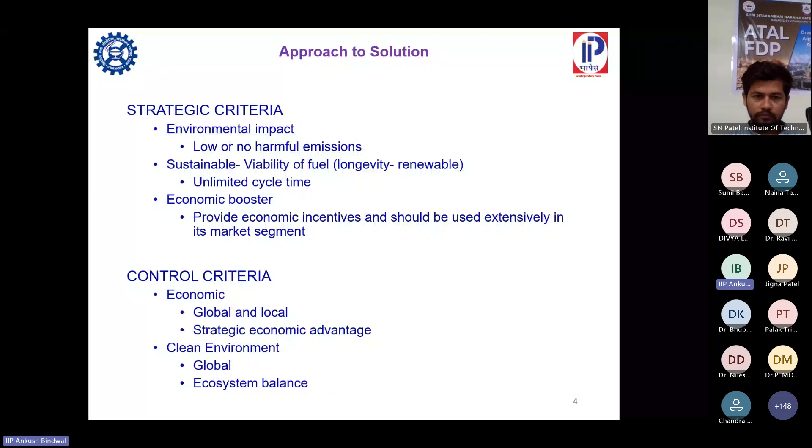Globally, what will be the effect of that fuel, and how will it affect the ecosystem balance? Whether it will maintain the ecosystem balance or disrupt it in another way. When we are trying to solve, suppose, a problem with water pollution, we have to ensure that we are not creating another problem for the landfills or any other component of our ecosystem.

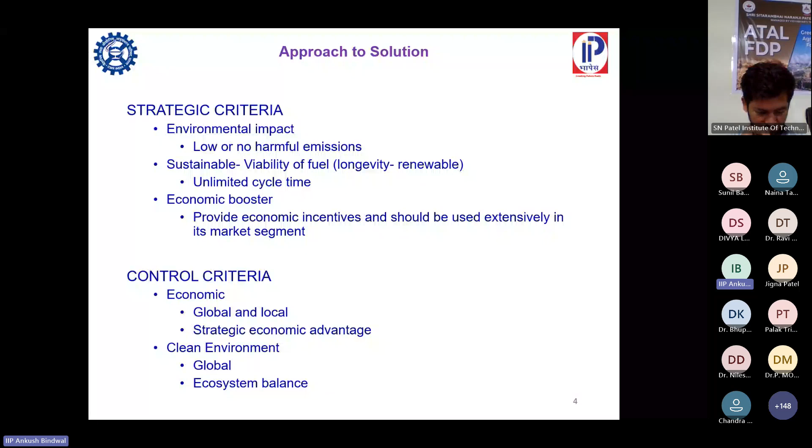So why hydrogen? This is the lightest molecule. It is abundantly found; we have it in abundance in every form in nature. It has the highest gravimetric energy density, and it is particularly known for its carbon-free nature. That's why it is being used as an energy carrier. Because of these properties, its abundance and its highest gravimetric energy density, hydrogen can deliver higher energy compared to its contemporary fuels.

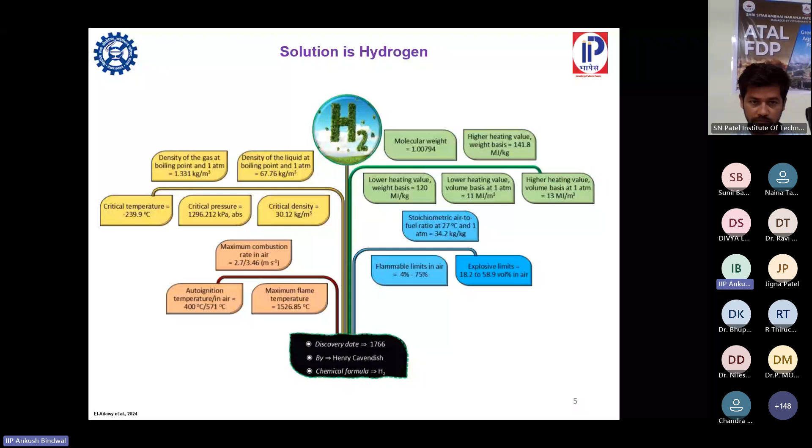Another property is that it is carbon free: when it burns or is utilized, there is no release of carbon into the atmosphere. The processes which involve hydrogen to produce and store energy do not release much carbon dioxide into the atmosphere, and that's why it is carbon free. And it is an energy carrier because it can carry energy from one source to another, and it helps us transport and use hydrogen in many forms: solid, liquid, or gaseous.

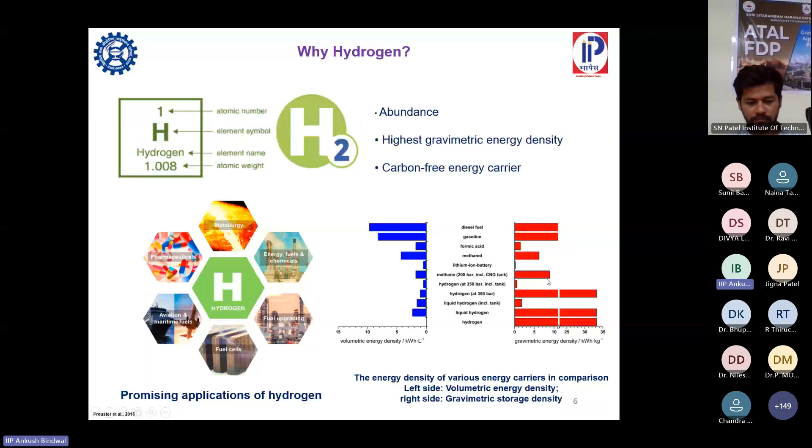So hydrogen, as said, was discovered in 1766. It is not a new concept. Long ago, in 1874, Jules Verne, a famous science fiction author, quoted: believe that water will one day be employed as fuel, that hydrogen and oxygen, which constitute it, used singly or together, will furnish an inexhaustible source of heat and light, of an intensity of which coal is not capable.

And we are living in this era where we are seeing this happen. So now everyone is talking about hydrogen, every private organization, every PSU, every nation; this globe is running behind hydrogen. But this is not the first time they are behind this concept of using hydrogen as a fuel.

The first wave was in the 1800s, when hydrogen was in the early phases, and it was used for lighting and heating. However, this wave ended as natural gas became a cheaper alternative. When natural gas came into the picture, the use of hydrogen for energy, lighting and heating purposes reduced, because natural gas was a cheaper and easier to use option. Apart from this economic, easy to use feature of natural gas, there are various safety aspects of using hydrogen in this sense. It is still struggling to find a place in these applications with the highest safety standards.

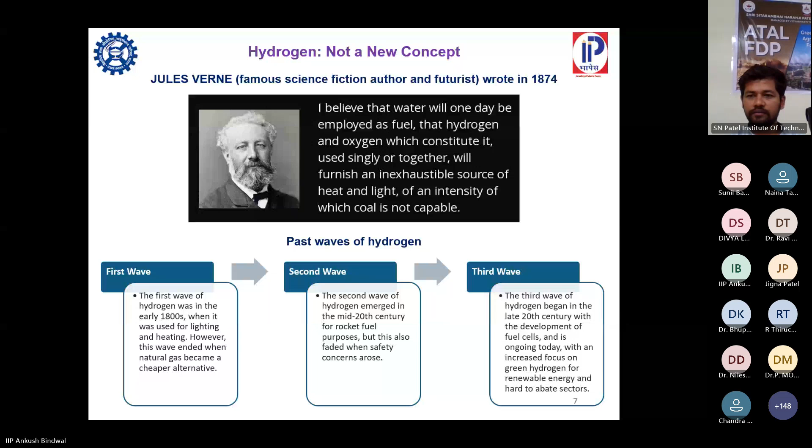Hard to abate sectors are defined with respect to decarbonization. These are the sectors which are very hard to decarbonize, meaning there are a lot of CO2 emissions. To reduce those emissions, we have to find an alternative, and this is not an easy task: replacing the old, established processes, which are efficient and economical in terms of production capacities, yields, and economics, though not with respect to CO2 emission. So it is very difficult to replace those hard to abate sectors with hydrogen.

So this is the global hydrogen demand by various sectors. As we can see, the refining industry has the highest demand. On the left side, it is current from 2020. The demand is shown in metric tons, and there are various applications of hydrogen: refining, industry, transport, power, ammonia manufacturing, synfuels, buildings for heating purposes, and grid injection for electricity purposes. So these are the current trends till 2030 for hydrogen demand globally.

And on the right side, there is the projected hydrogen demand per year for various sectors from 2030 to 2070. We can see that there is a switch from only refining, industry and ammonia. The projections say that there will be much demand for hydrogen in the power, transport, and building sectors, and the central grid. These will be the new applications of hydrogen apart from the existing applications in refining and industry.

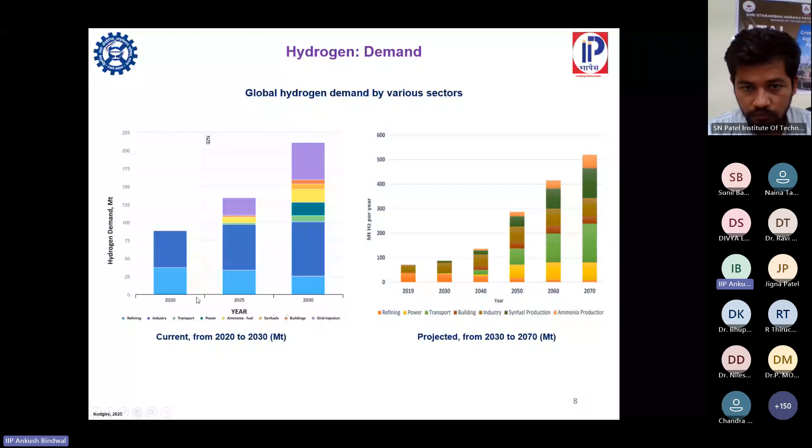So how is this hydrogen produced? There is one major, important classical process to produce hydrogen. It is through steam reforming.

This is the global statistics of hydrogen production in 2023. So these are the symbols which show how much blue hydrogen and green hydrogen is produced. Again, switch to green hydrogen, but nowadays it is very difficult to segregate it from the discussion of hydrogen, and that's why it came into discussion.

So blue hydrogen is produced by combining natural gas and heated water to form steam and includes carbon capture to reduce emissions. These are the two notable forms of hydrogen, blue and green. Otherwise, at present in many industries it is black hydrogen or gray hydrogen, where no carbon capture is being done from the hydrogen production processes.

So blue hydrogen is produced by combining natural gas, or by steam reforming, and it is combined with a carbon capture or storage option, so that carbon emissions can be reduced and this hydrogen production can be environmentally friendly, a little bit environmentally friendly, not completely.

And then there is green hydrogen, which is generated completely through the electrolysis of water using renewable energy sources like wind or solar power, resulting in zero emissions. Please remember, hydrogen produced even by electrolysis of water using energy received from fossil fuel cannot be counted as green hydrogen.

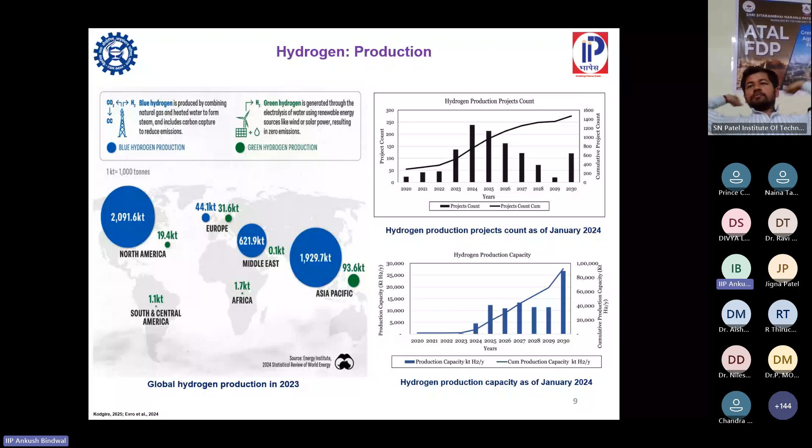So if we see these graphs, we can see that there is a fast jump in the production projects count as well as in the production capacity. It says that hydrogen is being talked about as a future fuel very seriously.

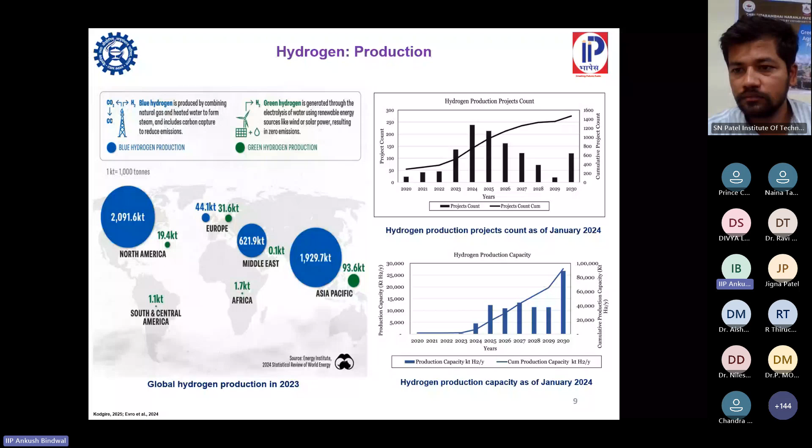So these are the hydrogen production sources and routes. The main sources of hydrogen are natural gas, oil, coal, electrolysis, and some other sources. In the breakup, among fossil fuels, natural gas and coal are the primary sources of hydrogen. Hydrogen can be obtained from natural gas through the steam reforming process. It is a very classical process.

And with the coal source, coal gasification can yield hydrogen. Whether it is coupled with or without carbon capture and storage states its nature, whether it is gray or blue. These are very high CO2 emitting processes, and we have to integrate carbon capture and storage along with them.

Then there is another option with nuclear energy, with two processes, thermochemical water splitting and high temperature electrolysis, to convert nuclear energy to hydrogen. Then there are renewable options, where solar photovoltaic, wind, and biomass can be used to produce hydrogen through electrolysis and gasification. So these are the primary energy sources, and these are the methods to produce hydrogen.

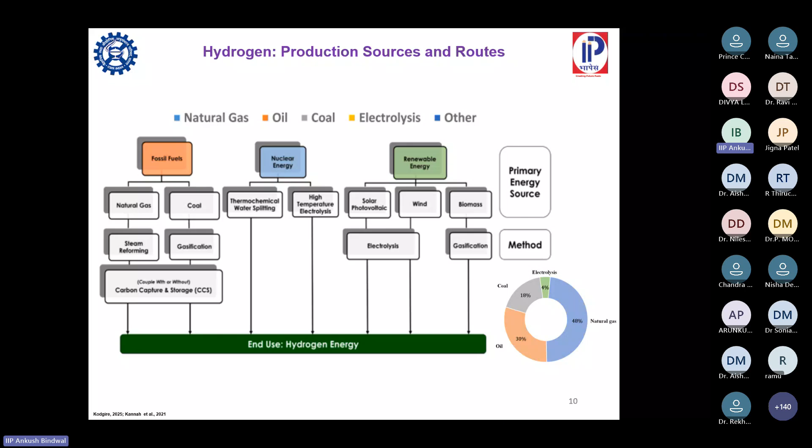In these processes, we can see the down arrow, which shows increasing carbon intensity. The least carbon intensive is the byproduct from chemical industry, then SMR of natural gas, and then coal gasification. Coal gasification has the highest carbon intensity, meaning it releases the highest amount of CO2 per kg of hydrogen produced into the atmosphere.

On the right side, there are emerging trends trying to reduce this carbon intensity or carbon emissions into the atmosphere. First is electrolysis with renewable energy, then fossil fuel plus CCS, electrolysis with nuclear power, methane pyrolysis, and electrolysis with grid electricity. These are in reverse order, so the least carbon emitting option is electrolysis with renewable energy.

Among the new or emerging options available to produce hydrogen, there are these five options, with electrolysis using grid electricity being the highest CO2 emitter among them—less compared to the conventional options, but high compared to the other emerging options.

The world is focusing on electrolysis with renewable energy as a temporary solution until we arrive at the perfect process for this. We also have the option to use conventional fuels with CCS, so that carbon can be captured, used, and stored or recycled into existing processes.

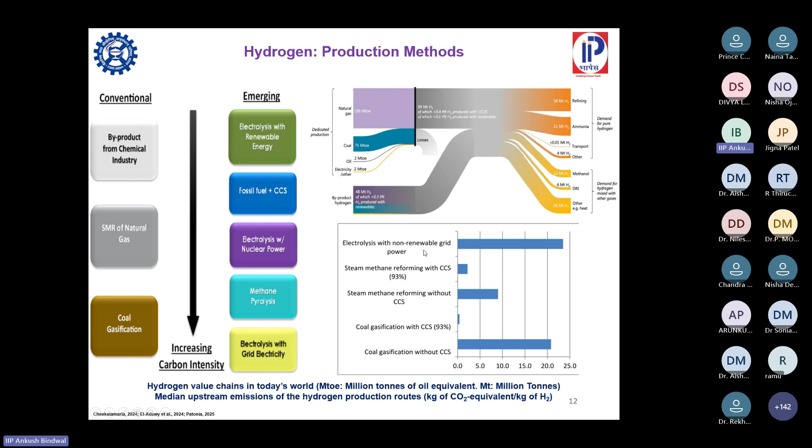Based on these CO2 emissions and sources, hydrogen can be broadly classified into these colors. Several new colors are emerging, but these are the earlier classifications used to color-code hydrogen for easy understanding of its source and CO2 emissions.

First is white hydrogen—natural hydrogen found occurring naturally in the Earth's crust, produced through geological processes without human intervention. Then yellow hydrogen, which is produced through electrolysis using grid electricity.

Turquoise hydrogen is produced by pyrolysis of methane. Purple hydrogen uses nuclear power through a combined thermochemical or chemo-thermal electrolysis process. Pink hydrogen uses purely nuclear energy to produce hydrogen.

Gray hydrogen is produced by SMR or steam methane reforming of natural gas without using CCUS. Blue hydrogen uses CCUS to capture the CO2. Brown hydrogen is produced from coal through the coal gasification process.

And then the hero of the day—green hydrogen—can be produced from water electrolysis or biomass gasification using completely renewable energy sources like solar and wind.

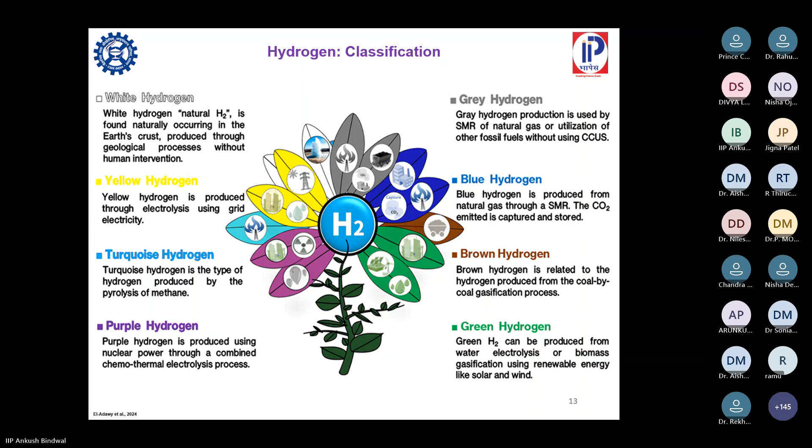So in gray, blue or green hydrogen: the gray has CO2 emitted in the atmosphere, in blue hydrogen the CO2 is stored or used, and in green hydrogen no CO2 is emitted in any form or at any stage of its life cycle or the life cycle of that particular process or product. So if we see the carbon emissions of these various color hydrogens, the lowest is green hydrogen, and black, brown or gray has the highest carbon emissions in the processes.

And if we try to quantify this, you can see the gray hydrogen produced from steam methane reforming yields 9.89 kg of CO2 per kg of hydrogen produced. While if we connect CCUS to it, it can be reduced to 3.32 kg CO2 per kg of hydrogen. And the turquoise hydrogen, using plasma, and green hydrogen using photovoltaic electrolysis or any renewable source like wind electrolysis, you can see these figures go down nearly to zero. So this is the beauty of this hydrogen combined with renewable sources.

So how this green hydrogen can help us in carbon-free transitions - these are the processes. The conventional process of steam methane reforming is now combined with carbon capture and storage. Then there is natural gas based renewable heat and methane pyrolysis process, which has carbon as byproduct, and then water electrolysis.

And these are the carbons: this is the conventional process, it has the highest CO2. This has natural gas combined with CCS, it has low CO2. Then renewable heat is integrated into it, and carbon is captured and used as a byproduct, it becomes CO2 free - though still there is carbon as a byproduct involved in its life cycle. And then there is electrolysis, where carbon is completely free - carbon is not at all involved in its entire life cycle.

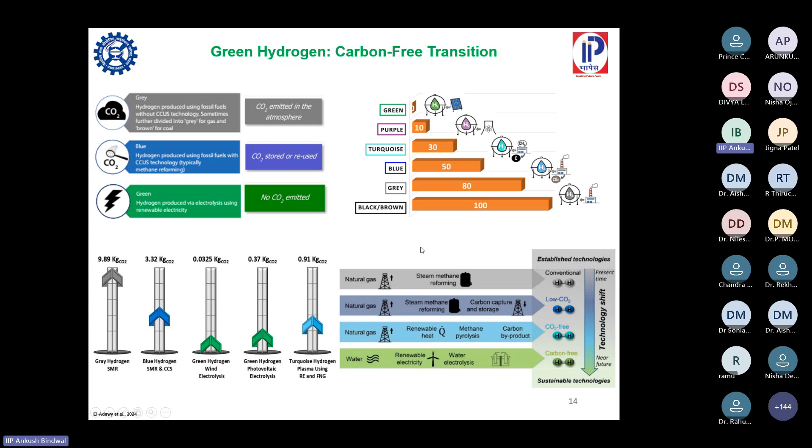So the major focus areas of green hydrogen: as a feedstock, it focuses on fertilizer industries, refining industries, bulk chemical industries, and iron and steel industries. And if you talk about its nature as an energy carrier, it finds application in energy storage, blending with natural gas for cooking or heating purposes, long-haul mobility like transport, and maritime and shipping industries.

So this hydrogen has two points: one, it can be used as a feedstock, or another, it can be used as an energy carrier. And this green hydrogen can replace fossil fuels in all of the above applications if these processes are developed with utmost care and attention.

So this is a tree again of where green hydrogen can find applications. The first is environmental decarbonization, which is the primary objective of green hydrogen's role in our generation's energy scenario. Then in industries as heating feedstocks, in buildings as heating power, in transport, in aviation industries, fuel-cell electric vehicles, and shipping in maritime industries.

Socially, the social role of this green hydrogen is that it can generate job opportunities when there are many more plants focusing on green hydrogen, or many more investments come in. It will create jobs and generation, and it will obviously help social development and economic growth as well.

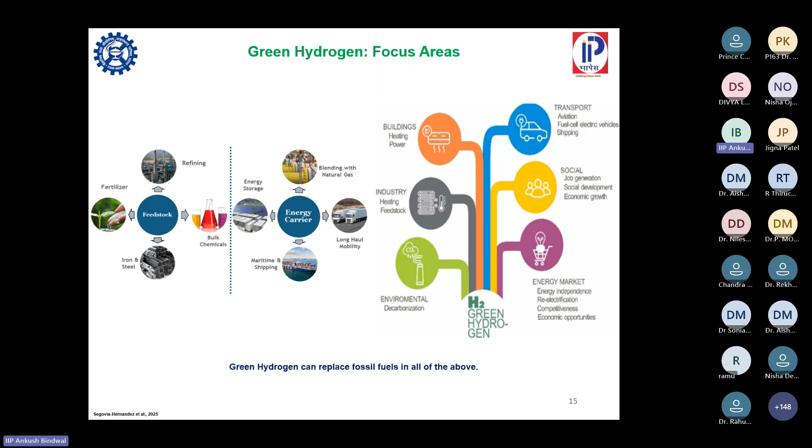So we talked about the hydrogen production methods earlier, including steam methane reforming, but now we are shifting to green hydrogen and its production methods. Green hydrogen can be produced from 3 processes: gasification or reforming processes, electrolysis, and thermochemical cycle of water splitting.

First is biomass or bioethanol. Through pyrolysis of biomass, we can produce hydrogen. Then there is bioethanol, which can be used through a biological process or a reforming process. If taken as a biological process, there are biological ways to produce hydrogen through bioethanol. And if bioethanol is used as a replacement to conventional fuels used in reforming processes to produce hydrogen, it can be used to produce syngas and then hydrogen through the water gas shift reaction.

Then there is another process: the electrolyzer, or water electrolysis. With the help of renewable energies, it can be completely carbon free and can produce green hydrogen. And then there is the thermochemical cycle of water splitting, where...

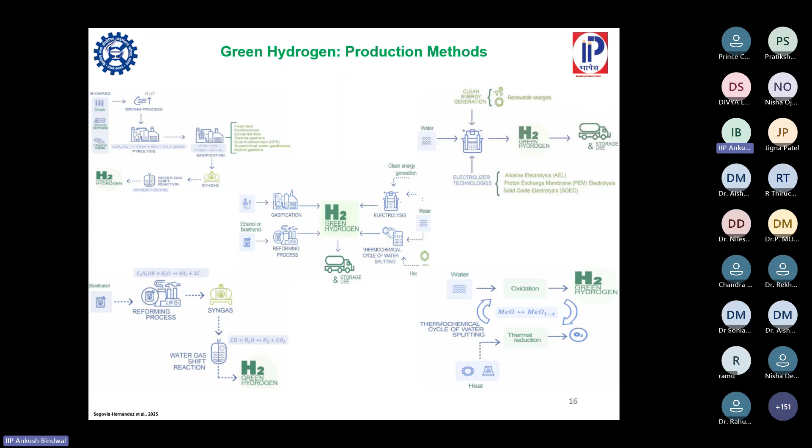To produce hydrogen from hydrogen sulfide and from refinery sources. The source is still hydrogen sulfide, which comes from fossil fuels, but looking at the trouble this hydrogen sulfide creates in the refineries, we have identified that problem and we are working on this concept of producing hydrogen. It is not green hydrogen, because at one stage we have to supply heat from conventional electricity, but it can be converted into green hydrogen if that source is replaced by renewable sources.

So these are the green hydrogen production statistics. Earlier I showed hydrogen production statistics globally, including blue, green, gray, brown, whatever color you thought of. But this is typically the green hydrogen production statistics in 2023, the global statistics, and you can see that China is the biggest producer of green hydrogen today. This is the percentage of global hydrogen produced globally and each country's contribution. China produced 75.30% of the entire global green hydrogen in 2023, and India stood at 0.85%.

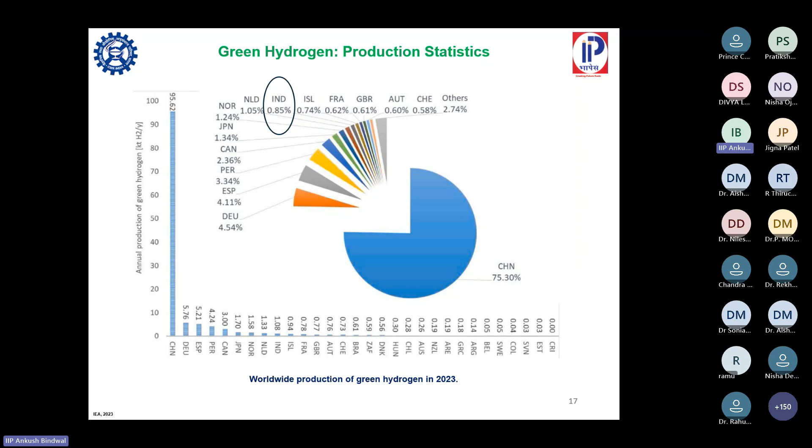So to improve this situation and to focus on green hydrogen, to invest much into green hydrogen, the Government of India announced the National Green Hydrogen Mission in 2023. It has linkages with the net zero goals, and it is one of the ways to achieve net zero goals apart from decarbonization or development of renewable energy sources like wind power. So the government is also focusing on the green hydrogen mission, looking at green hydrogen as one of the pillars to achieve the net zero targets.

Which is targeted for 2070. So in this mission, there are 3 stages. By 2030, the targets are set at 500 gigawatt of non-fossil fuel capacity from hydrogen, then 50% of installed capacity from non-fossil fuels, and reducing emission intensity of GDP 45% below the 2005 level. Then by 2047, we have to achieve energy independence, and by 2070, we have to achieve the net zero goal, that we will not emit any CO2 or carbon in the atmosphere by then, and we have to modify our processes to achieve this target.

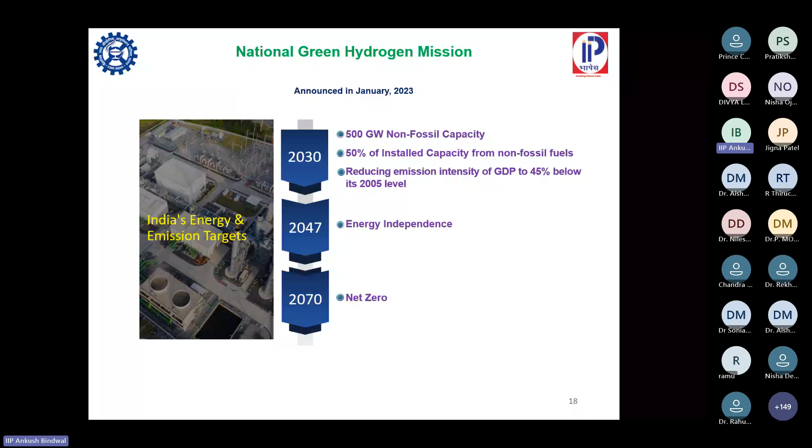And these are the short-term targets to achieve by 2030 under this National Green Hydrogen Mission. So at least 5 million metric ton of green hydrogen annual production should be there. The electrolyzers should have the cumulative capacity of 60 to 100 gigawatt producing hydrogen. Then total 125 gigawatt of renewable energy capacity for green hydrogen generation, and associated transmission network to replace the current electricity power grid.

We have to save rupees 1 lakh crore in import savings, that we are currently importing hydrogen, and we have to increase our production capacities so that this huge amount can be saved and we can achieve an independence in producing hydrogen. We have to avoid 50 million metric ton of CO2 emissions, annual emissions by 2030.

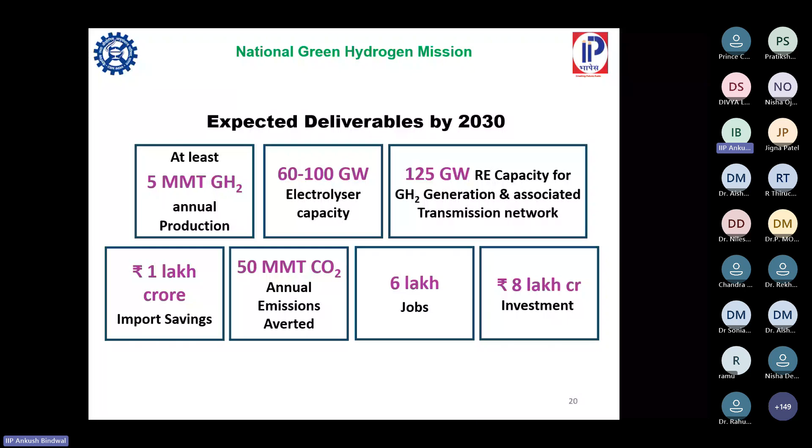While doing this, we have to create around 6 lakh jobs and 8 lakh crores of investment from Indian industries, private sectors, both sectors, and global industries as well. So these are the targets set, and everyone in this chain is working to achieve these targets.

So these are the existing and potential sectors in India that will be benefited by using green hydrogen. So the basic target of this green hydrogen mission is the electrification and hard to abate sectors. So electrification is one of the basic targets. There are many aspects of using green hydrogen for various purposes, but the major purpose is to reduce CO2 emissions from these hard to abate sectors like refineries, fertilizers, steel, chemicals, and

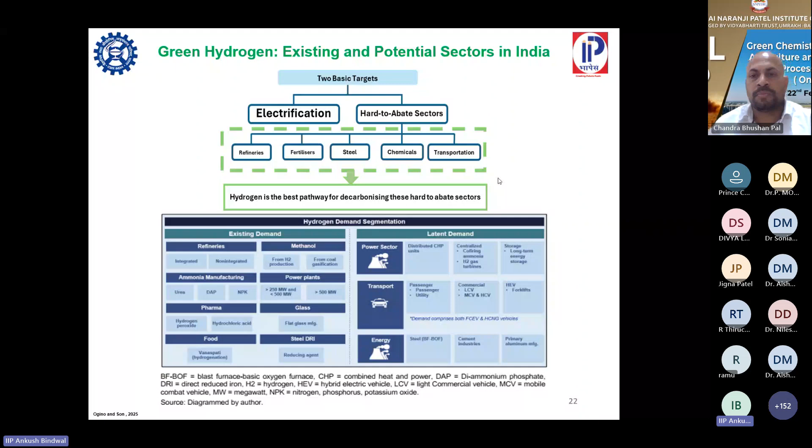So green hydrogen's critical roles during the energy transition to combat global warming are these. First is renewable energy integration, and second is the decarbonization of energy systems. If hydrogen is integrated with renewable energy, these integrations will be flexible systems. They will have increased accessibility, enhanced resilience, multi-generational options, reduced monopoly of fuels, and improved efficiency over other fuels.

Then decarbonization of energy systems can help us achieve cleaner transportation, cleaner industrial processes, cleaner outputs to meet the needs free of CO2. We will have a renewable feedstock for all the sectors hydrogen is used in, reduce the environmental impact, and of course increase sustainability. So this is green hydrogen's role in tackling renewable energy integration and decarbonization, and finding solutions for industries where hydrogen is used or will be integrated.

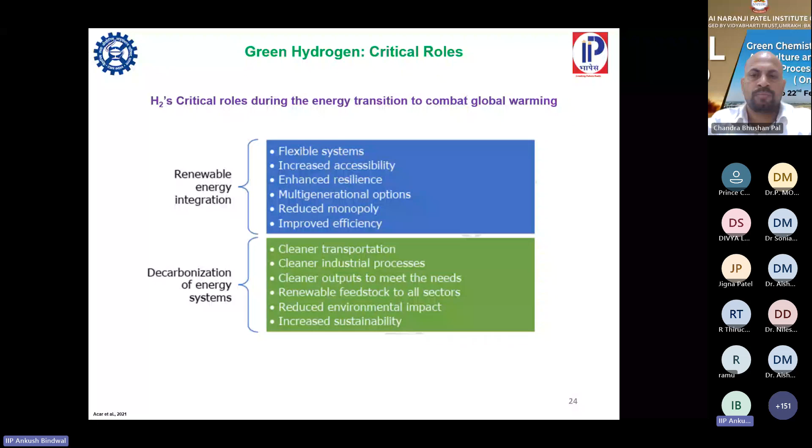Apart from these major current challenges, which we saw on the first slide, there are many more challenges on this globe. The United Nations is trying to find a solution for them, and they defined some sustainable development goals, which is also the title of the talk: the role of green hydrogen to achieve these goals. But before that, we should know what sustainable development is.

So basically, we have a lot more problems than energy, global warming, and clean energy. Although we do not face those problems in our daily lives, many poor countries, still underdeveloped, are trying to find solutions for very basic problems which are not problems for many developed nations. Several countries are still trying to find food, fight hunger, malnutrition, gender inequality, and address job creation and quality education.

The United Nations has listed those problems, and based on them developed goals so that there should be sustainable development globally for each and every country, each individual, and each component of this universe. They term these the sustainable development goals. The simplest definition is a to-do list for the planet that will transform the world: activities, tasks, and subtasks they are trying to achieve by 2030, or at some later stage.

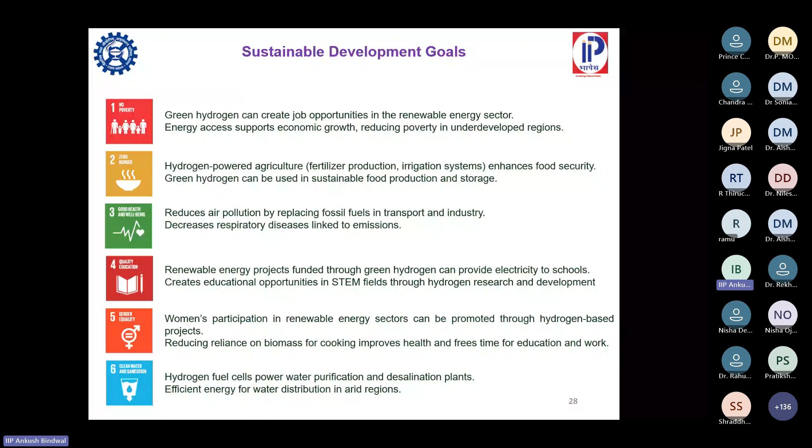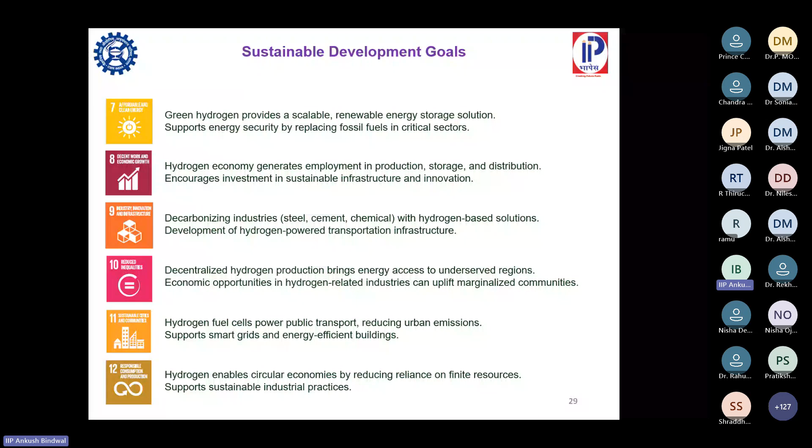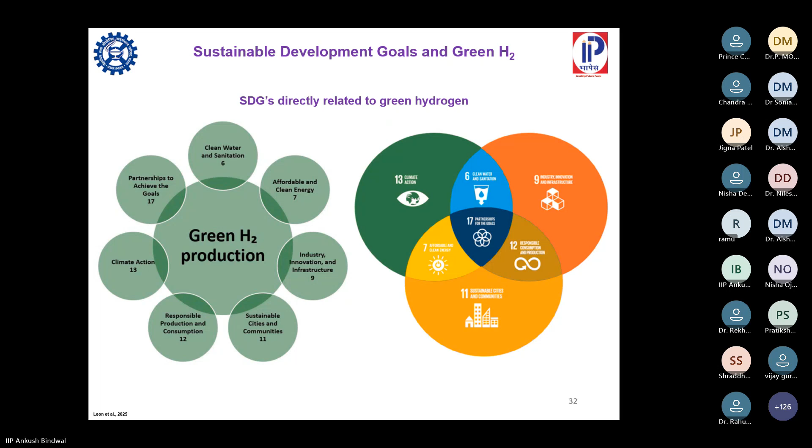And this is the diagram which shows that apart from the independent goals, green hydrogen can contribute to all these goals in a combined manner as well. So as said earlier also, hydrogen has a life cycle. So only the production is not the aspect. There are other aspects of hydrogen, and this is the life cycle of hydrogen.

Hydrogen is produced through these sources: natural gas, coal, biomass, waste, water. It is produced, then there is need to store it, then there is need to transport it, and then it is used in specific applications. It could be steady state application like energy plant, CHP, UPS, or burners, or it can be mobile applications like aerospace, vehicle, or electronic devices. And in each of these life cycle stages of hydrogen, there are a lot of opportunities, there are a lot of challenges that remain to be solved.

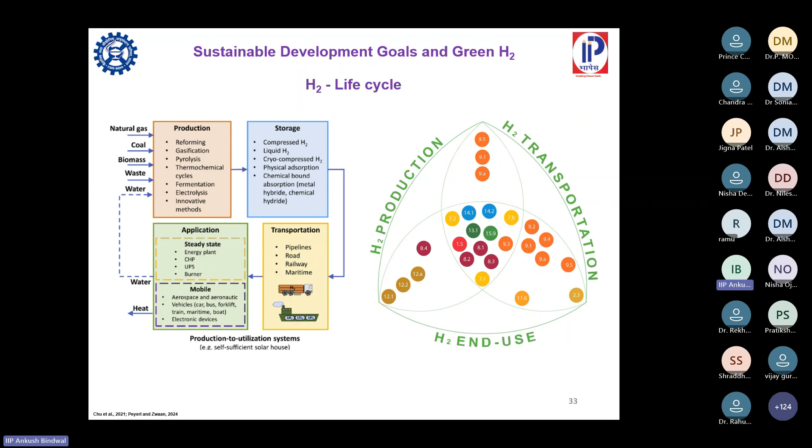And this diagram shows how hydrogen production, hydrogen transportation, hydrogen end use can solve the specific goals. So these are the subtasks 9A, 9.1, 9.2 numbers, which show that these SDGs can be solved through use of sustainable green hydrogen. So this is the diagram, and this shows how this production, transportation, and end use can help to achieve each and every goal.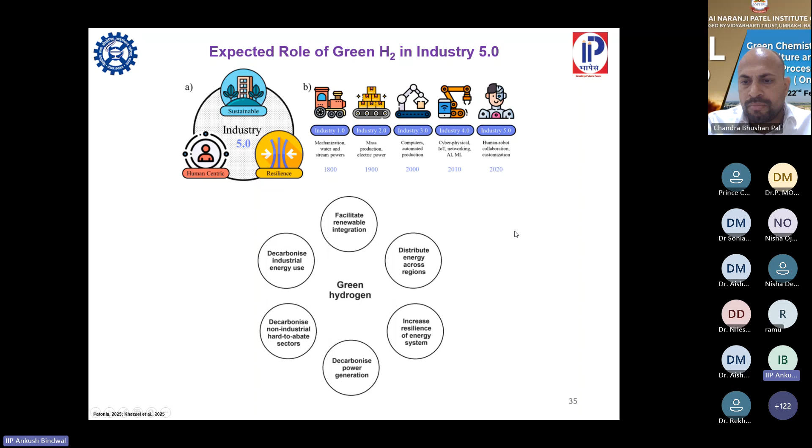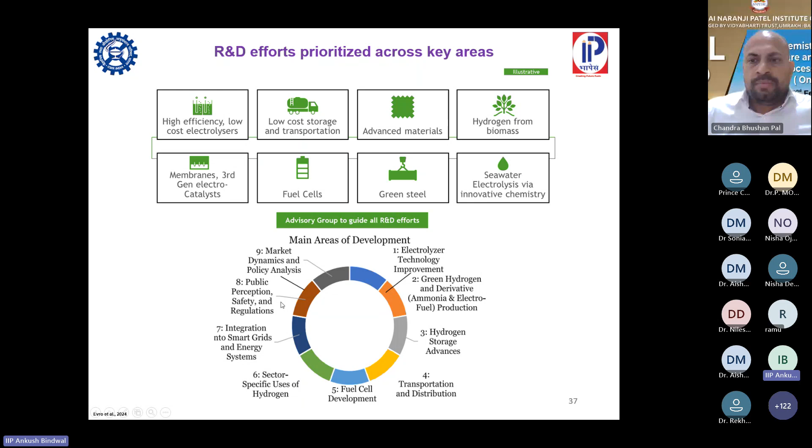And these are the main areas of development for green hydrogen: electrolyzer technology improvement, green hydrogen and derivatives, ammonia and e-fuel production, hydrogen storage advances, transportation and distribution, fuel cell development, sector-specific uses of hydrogen, integration into smart grids and energy systems, public perceptions, safety and regulations, and market dynamics and policy analysis to use green hydrogen in these areas.

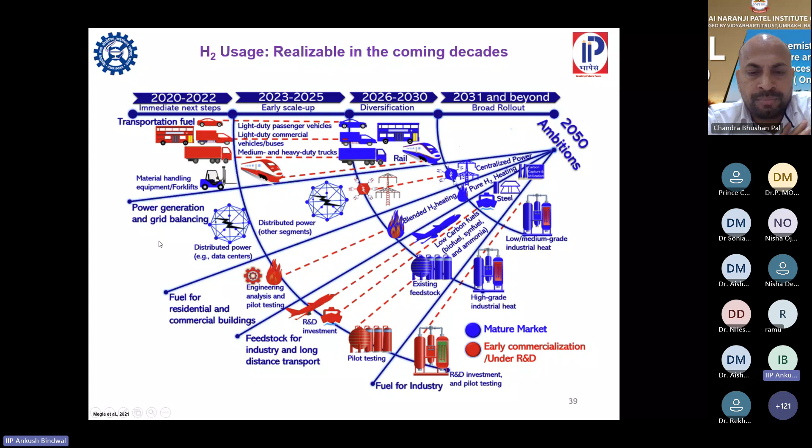These are the uses of hydrogen that are realizable in the coming decades, when we will be living in the hydrogen economy. Currently we are using hydrogen for transportation fuel, power generation, grid balancing, at some places for residential and commercial buildings, for industry, long distance transport, and fuel for industry.

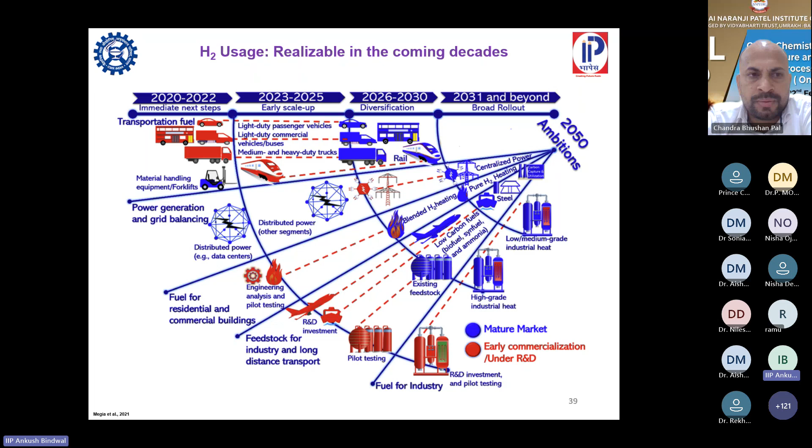And we are looking to go beyond 2031, where it will be used for centralized power, pure hydrogen heating rather than natural gas heating, green steel manufacturing, low and medium grade industrial heat, rail transport, long haul transport, commercial vehicles, passenger vehicles, trucks, distributed power systems, and aviation. This is what everyone is aiming for by 2050 or 2070.

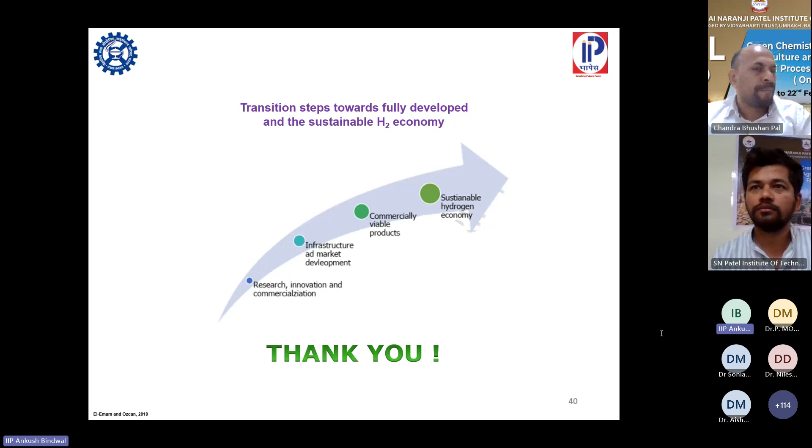One more question posted: green hydrogen has less carbon emissions, so how do we bring this into the knowledge of the public to use it as a fuel?

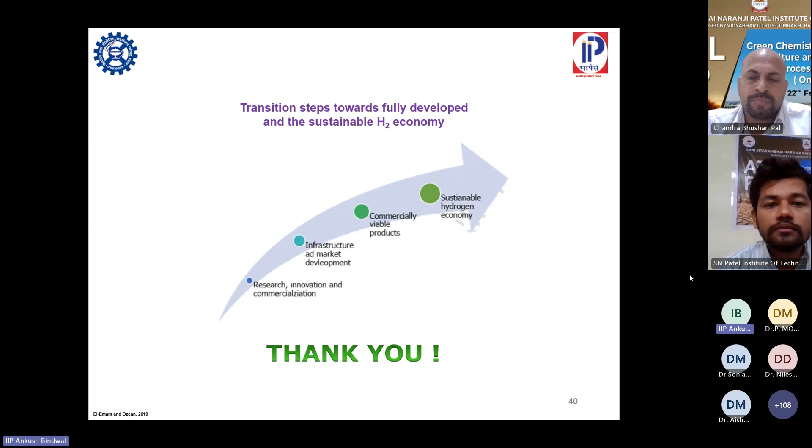We use electric vehicles as an example. We were not aware of them till Tata and others brought these electric vehicles into our lives. Now we are using it heavily, relying on it. People have only electric vehicles and use them for regular commute. So this is the way that whenever these applications are developed and come into our lives, people will start believing in the potential of green hydrogen. The same happened with CNG, the same happened with electric vehicles, and the same is going to happen for green hydrogen. First, industrial level solutions will be developed, then it will be developed for transportation applications parallelly, and we will become aware as we accommodate it into our lifestyle.

Regarding using fuel cell burners, I am not aware of this innovation, but if it is safe and those students are claiming that it can be used, you can try it.